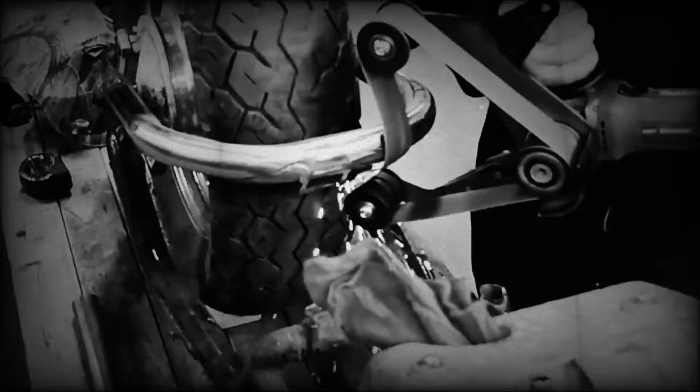We are going to jump back on the Indian Larry tribute Panhead build today. That bike kind of got pushed to the side. The white Fat Boy rebuild that we just finished doing belongs to the same person, and so we decided to do that Fat Boy build as it was just a quickie in relation to what we're doing with the Panhead. So the Panhead build got mothballed for a minute, but we're going to jump back on it today.

I believe my plan is to work on the left side foot control. I think that's where I left off. It's been quite a while since we worked on this bike, so I'm a little bit turned around on what exactly we were doing. But that's the plan. I'm going to kind of get back into that, get my mind wrapped around what we were doing there, and see about working on the left-hand foot control, which is going to be a foot clutch, pedal, peg mount, all that good stuff. So we're going to hop out there and see what we can figure out.

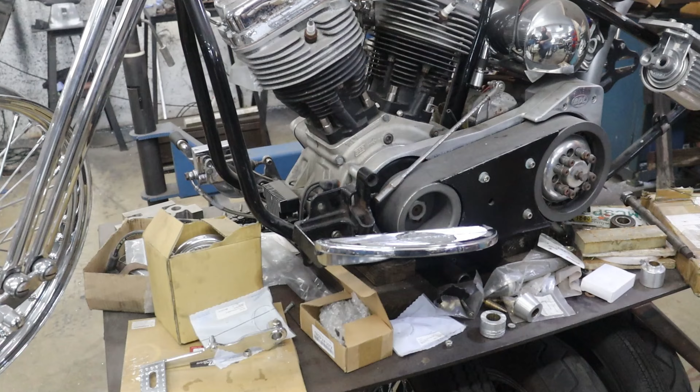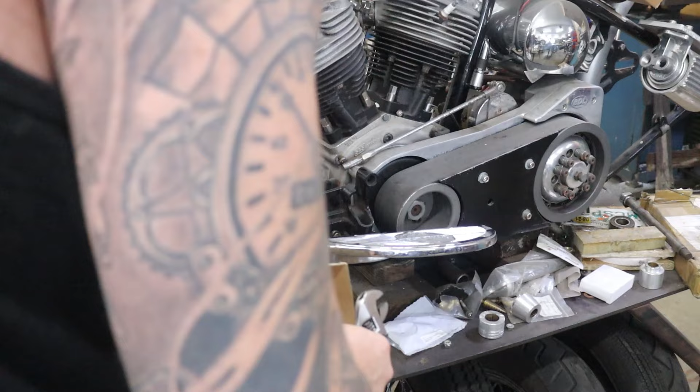So our original plan was to run floorboards on this bike, but after mocking these up, I really just did not like the way they looked. So we elected to ditch the floorboards in favor of something else. So I'll go ahead and get this off of here.

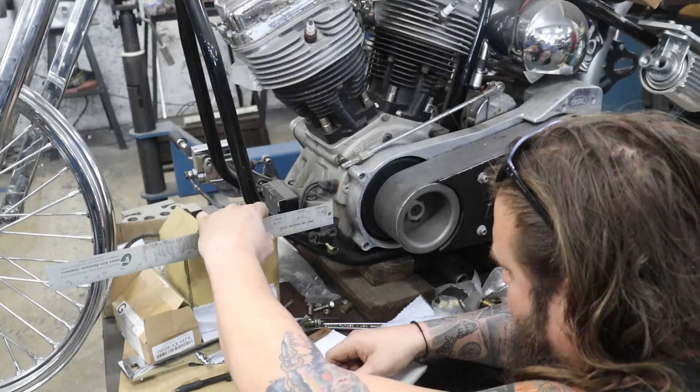So first thing we got to do is make up a little drawing so we can make our main mount on the plasma table here. I probably have this dimension already in a drawing somewhere because we've done obviously tons of foot peg mounts, but it's easier to quickly sketch it out. Got our 3 holes. Looks like 1 3/8 on both hole spacing, so that's nice and easy.

And then I want to bring the peg up a little bit, so I think we'll bring the peg 2 inches up. And then I also want to bring it back, being that it's a foot clutch. I find you have much better leverage when you bring it. I'm going to bring it in kind of snug. I think we'll do 2 inches back too. We'll try that. All the pieces can be interchanged. Obviously we can remake this piece if we don't like it, once we actually get it all situated and are able to measure.

So we're going to use this clutch pedal, which is a WR clutch pedal. So it'll basically end up kind of here for our clutch action. We'll make up a custom rod, obviously a custom hand shifter. But first things first, we got to go to the computer and draw up our parts.

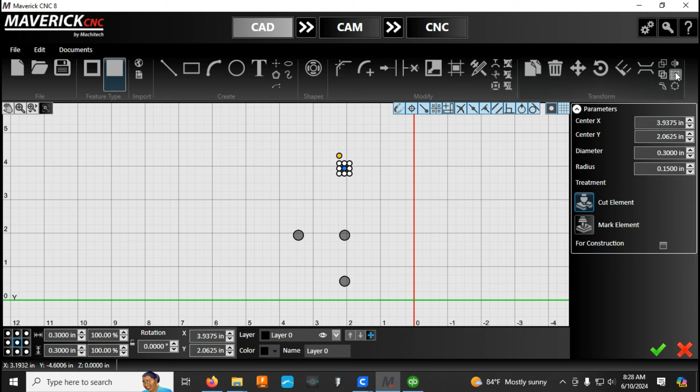And then, like we talked about, we're going to do our peg mounting hole. We're going to locate it off of this upper back hole, which is what I measured up outside. And we're going to go 2 inches up. And then we're going to go 2 inches back. So that's 270 degrees. And then we're going to go 2 inches there.

And this one here we're going to get rid of because that was just a reference hole. We're going to move this over. And now we have all 4 of our holes located in space, and we can start to make our actual part for the shape we want.

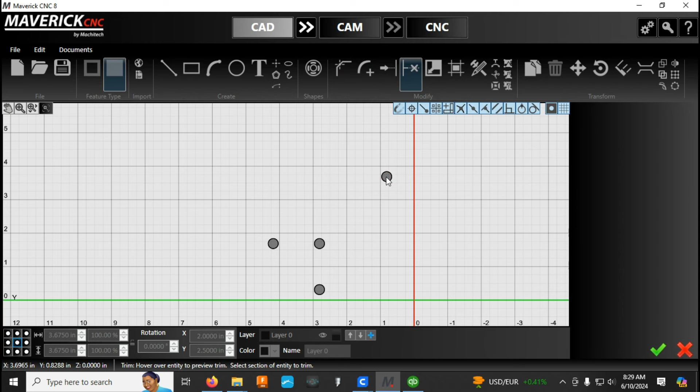So my plan is to use a piece of 1.5 inch round aluminum to start as the pivot point and peg mount, which will go up here. So in order for this to look right, I'm going to find the center of this, and I'm going to give myself 1.6, so that radius will be a little bit larger than the 1.5 inch. Once we get that piece made and we can bolt it on, we can sand those edges together perfectly for a nice super clean look. So that's why we go a little bit oversized.

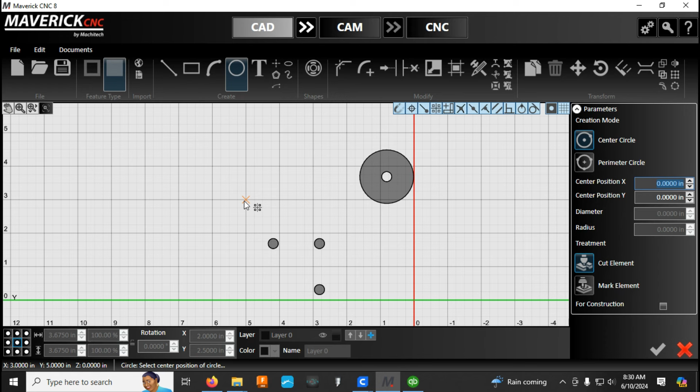Again, anytime you're doing plasma cutting, you run into issues where the cuts are never perfect. They always have some little bit of taper. There's always kerf involved. So when we're trying to make a really perfect finished part, I like to go just a touch oversized, and then you can either sand it or machine it into the perfect fit you want.

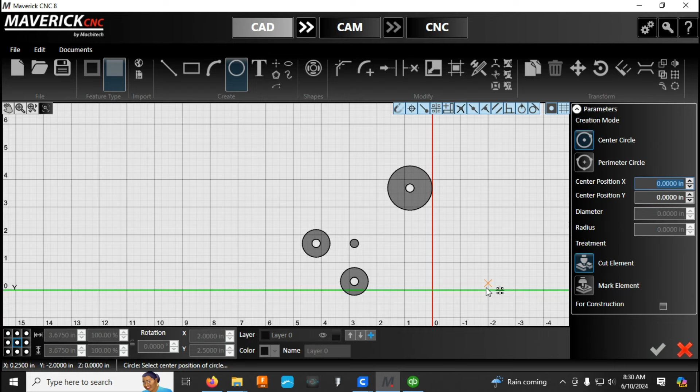So we're going to go up here. We're going to do the same thing, but we're not going to go that big. We're just going to go with a 1 inch radius, which should be good enough for overall look on the frame. We're going to do a 1 inch radius here as well. Obviously, when we get outside of our cut envelope, I'll just grab everything and move it up.

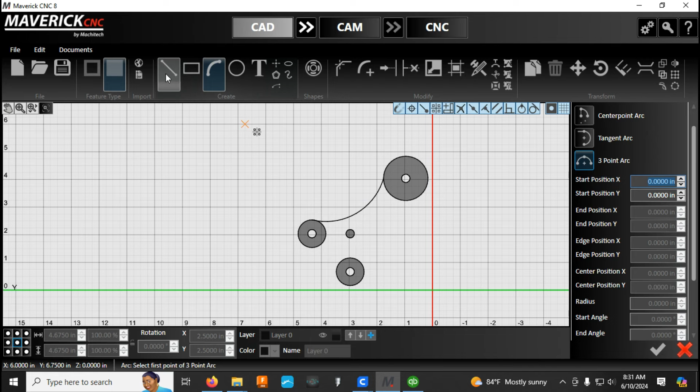So now we have basically the outline of our pieces, and we're just going to start to look at filling it in. And this is really purely cosmetic. So I'm going to go here and just lay in a little radius, however I think it looks good. On this side, I'm going to go straight. So we'll just get a straight line to the tangent. Get another one to the tangent there.

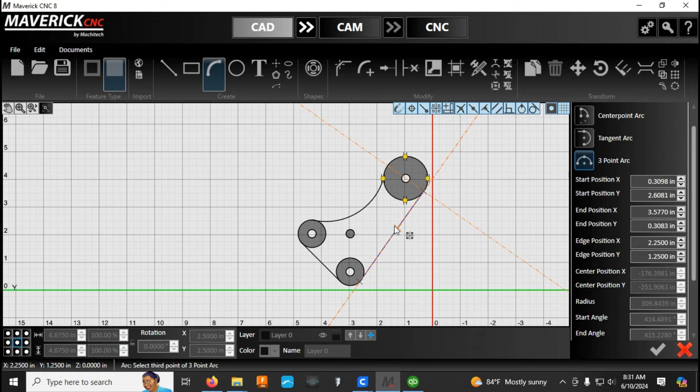And what do I want to do here? Let's try from the tangent to the tangent, and then just a really slight radius. So now you can see it colored in because we have a complete border. We're going to get our trim tool now. We'll cut out all the rest of these pieces that are no longer required.

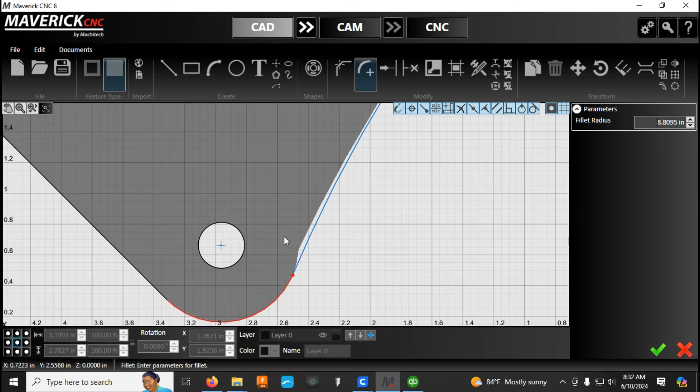And then you can see here where you get a little bit of a funky angle. So here we're going to use our fillet tool, and I'll use a huge fillet radius here, and it just cleans up the look. And we'll run our tool, which checks for any issues, and no issues found, so we're good there.

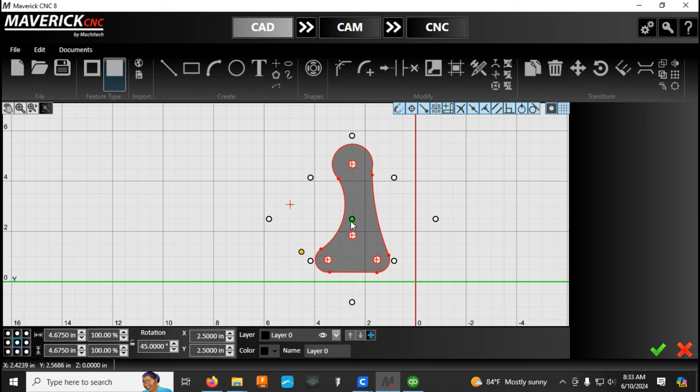I like to reposition this into the most compact little corner you can. It just saves material when we cut. We're going to be cutting this out of some 3/8 aluminum. So just tuck that into the corner as good as possible. And then we're going to save it on our flash drive to take it out to the table and cut.

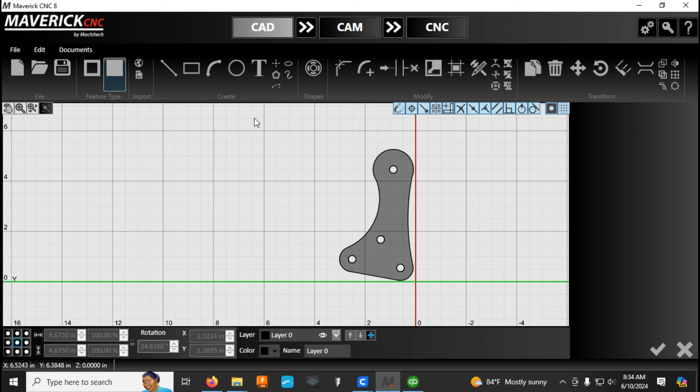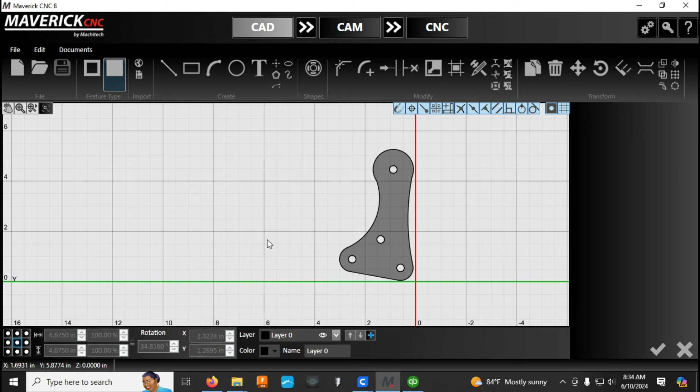Here, file, save as. What is this? Panhead, left hand, foot peg, mount. Alright, we got that saved. We're going to head on out to the table and make a part.

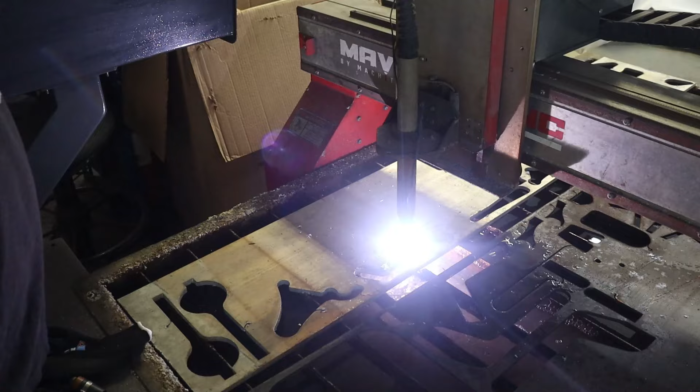Alright, so we're over at the plasma table. Got the program loaded. Going to go ahead and get this thing fired up and get our part cut out. Again, like we talked about as we were drawing, this is going to do all our rough cutting, and then we'll do the finishing work by hand.

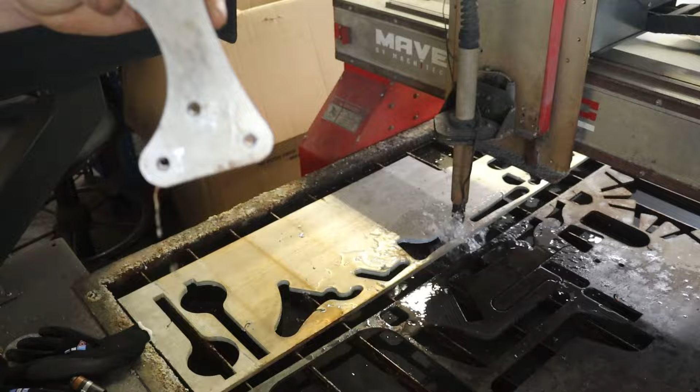Once we got that part roughed out, quick trip over to the drill press. We'll open up all our plasma cut holes with a standard 3/8 twist drill. Get everything nice and clean and a lot easier to bolt on than trying to plasma cut the holes, which always end up a little bit tapered and with some slag on them.

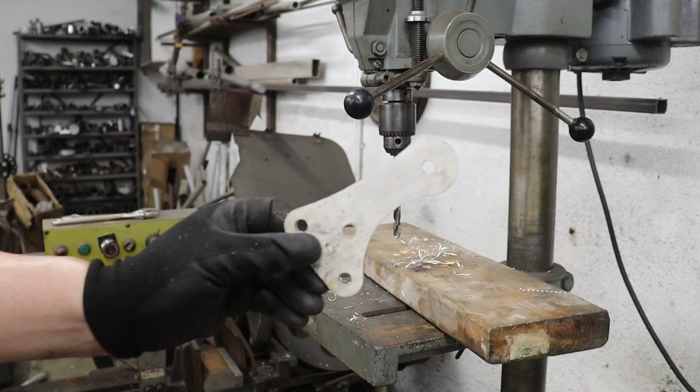So now that we got the part all roughed out, we'll get it bolted onto the frame here and start looking at our mock-up. We're going to add an additional hole to this for the foot peg clevis, but I didn't know exactly where we would want that until we could get it held in place in relation to the brake pedal and all that different stuff.

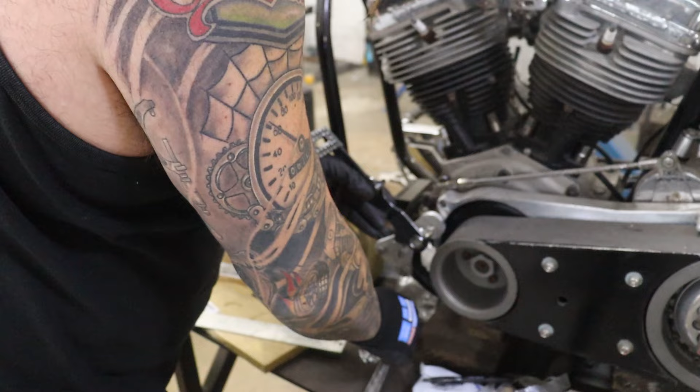So right now we're just kind of eyeballing everything, seeing how the fit is going to be and figuring out our distances as far as our spacers and pivot point dimensions. So you can see here, just grab the ruler and just figure out how wide we want to make that pivot point from the mounting plate to actually where the brake pedal pivot will be.

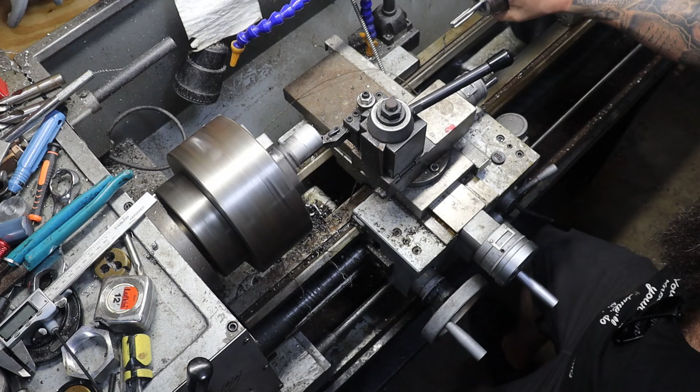Once we got that determined, we jumped on over to the lathe, chucked up a piece of 1.5" 6061. We'll go ahead and face it off to get started, adding some Dykem layout fluid here. Once we get it faced off, we'll be able to do our layout. Our WR foot pedal has a pivot point that's about 1 inch thick.

So we're going to do a 1-inch shoulder for that and an additional 1-inch space to move it away from the mounting point. So overall, we'll have about a 2-inch piece with 1-inch shoulder turned on it, and then the secondary shoulder will have a taper cut on it to taper down from the 1.5 inch down to the 1-inch radius of the brake pedal, just so everything looks nice and clean and looks like it was made to be together.

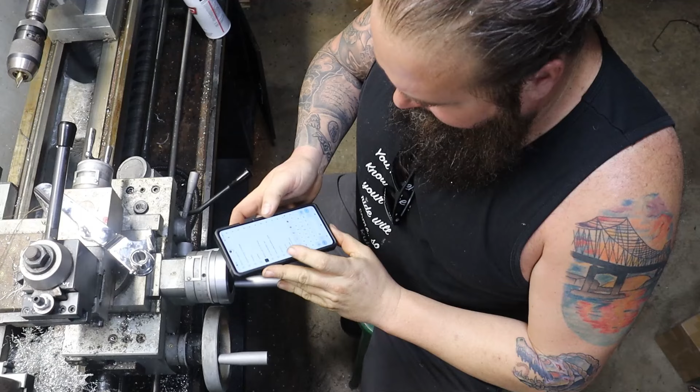So quickly now, I just pulled up an online taper calculator. These are super handy. I just Google taper calculator and use the first one that comes up. Real simple thing. You enter your major diameter, your minor diameter, and the length of the taper you want, and it gives you your degrees needed for your compound in order to make that taper happen.

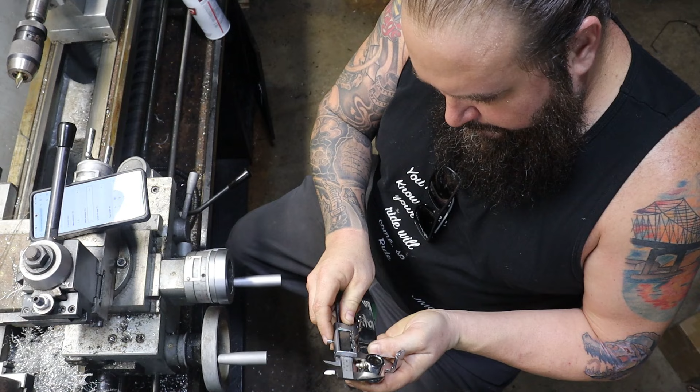So throw our dimensions in here. I believe it was 1.5 inches on the major, 1 inch on the minor, and our length of taper is 1 inch. So threw all that in there and it gave us 12.68 degrees. Pretty simple deal. This doesn't have to be incredibly accurate, so I just use the tick marks on the compound and line up. It's probably somewhere between 12.5 and 12 3/4. They're not real fine gradations, but we're not trying to match anything. It's just a decorative taper, so doing it this way works just fine.

And you can see here, we're just backing the compound out. It took maybe 10 or 15 quick passes with the compound to get down to our 1 inch dimension, just so that it lines up nicely with the brake pedal. Went ahead and straightened that back out, put our radius cutter in there, nice radius chamfer, center drill, and drill for a 3/8 tap. And that's what's going to give us our place for our end cap to bolt on and hold the brake pedal in place.

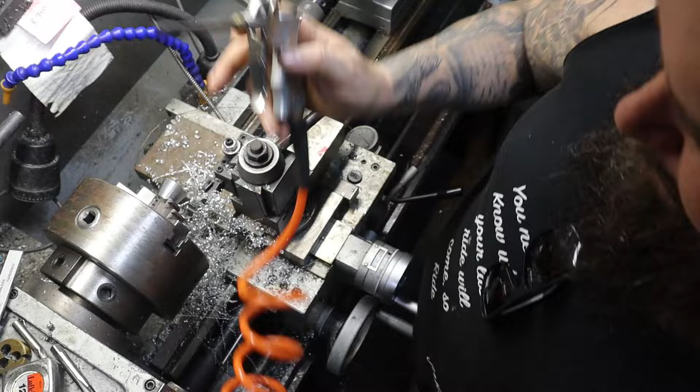So now we've got that part all finished machined. We're back over at the bike. Gonna get our clutch pedal pivot point mounted up to our foot peg bracket. And once we have that, we're gonna look at lining up our foot peg in the location we want. Gonna mount our foot peg into our clevis, so it'll be a nice flip-up foot peg, and it'll allow us to use any kind of foot peg.

These are the ones we kind of picked out, but I'm not really sure if I love them or not, so they may end up changing. Time will tell on that, but just figuring out what we want to do here. I noticed that the foot peg was in a little bit tight, so first thing we did is just give a little mark on our mounting plate. We're going to drill our hole. I'm going to pop this back off real quick, jump back over to the drill press.

Nothing too exciting. Didn't move the camera for all that, but just drilled another 3/8 hole, which will allow us to mount our foot peg clevis. And we're back with our part with the hole drilled in it, so we're going to remount that. We're going to put our foot peg clevis in using kind of a long bolt, so we have plenty of room to pull it in and out and figure out the width we need.

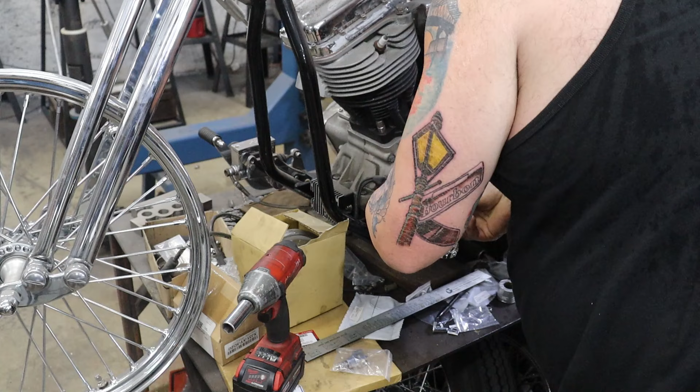Also went ahead and figured out the dimensions of our clutch pedal cap. Went ahead and machined that up out of some 1-inch 6061. Made a countersink for a nice flathead bolt. So got that installed, and then moved on to getting our foot peg spacer made up here.

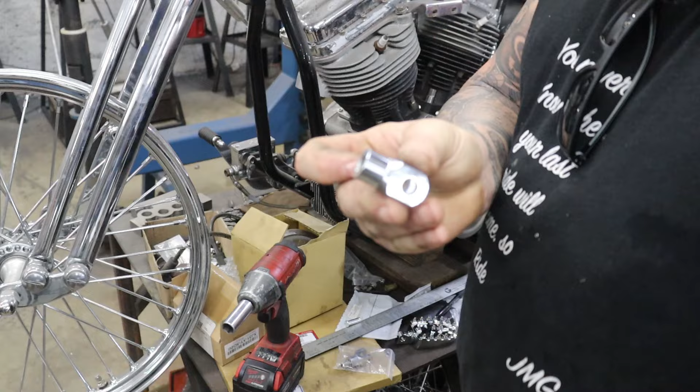Here you can see the narrow back on the foot peg clevis I was talking about, and this is now it with our new machined spacer, moving it out 3/4 of an inch. And I just like the thicker look. I think it looks nicer.

By doing this, we did have to remove one of the bolts holding the foot peg mounting plate on. No big deal there. I'll just go ahead and countersink that hole, use a flathead bolt. It's just the increased diameter of the foot peg clevis was causing a little interference there. So went ahead and got that snugged into position. And we're going to slide our foot peg in, put the pin in, and we'll have it all kind of mocked up.

Still debating on what we're going to do for the actual clutch pedal, whether or not we'll use a cable or a linkage bar, but had a little piece of throttle cable hanging around. So I went ahead and slid that through just to kind of hold the pedal in position so we can get a better look at what we were doing and figure out if that's what we want to go with or if we want to make any modifications before we do any more real heavy duty work with it.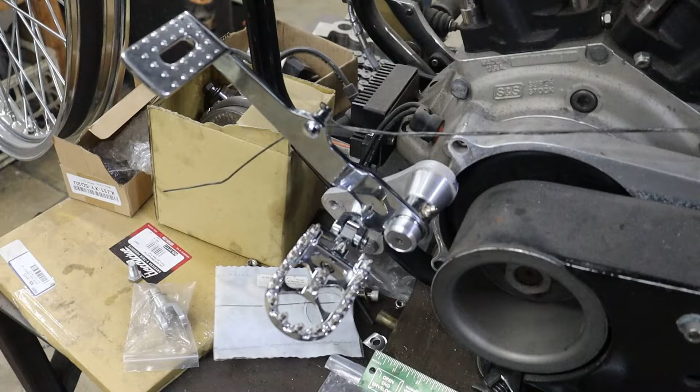So here you see all the mock-up done. You can see the cable holding the pedal up. We got our nice flush mount cap. Got our spacer on our foot peg. And like an idiot, I did not get any of the audio from our closing. So anyway, there was some stuff I talked about in there. We'll rediscuss that in the upcoming video.